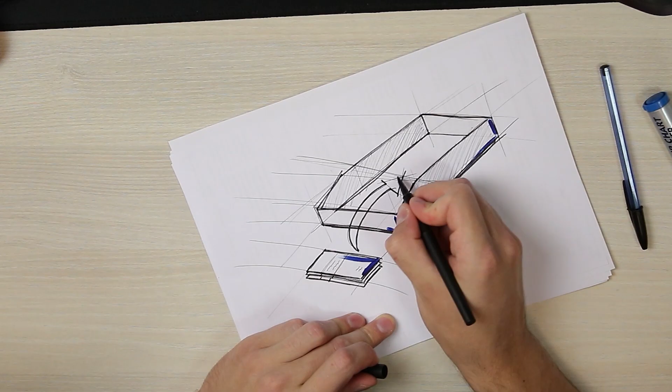Nope. So, the idea was, starting from a storage cardboard box, widely used in the rest of the inventory, find a cost-efficient way of having the different magnets displayed and arranged so that you can see every single reference at once, in alphabetical order, making it easy to grab one, restock, and all of that with a little bit of sturdiness. Because this ain't a fine watch manufacturer, it's a tea and coffee inventory. Gotta move. Gotta go fast. Looking for the big bucks down there.

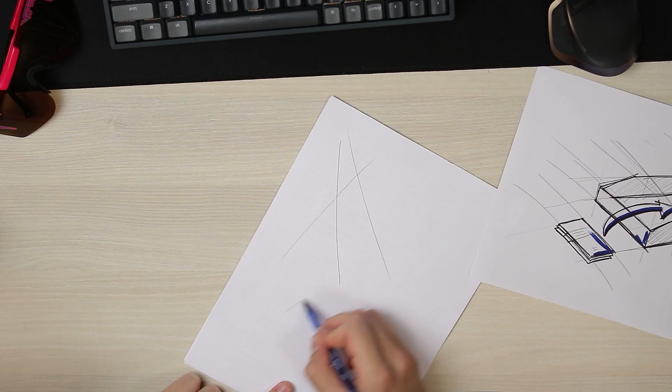With that information, I bust out the calipers, my measuring tape, pulled up my pens, and it was time to get into the intricate world of product design. I started with the measurements and the modeling of the box, in which I needed to make the entire contraption. I needed to come up with a solution to create independent compartments that I decided to call mag holders for every single magnet reference for a set amount of magnets. I called one compartment a mag holder. Yeah, it's badass. I like it. First one to judge is not invited to my trademark party.

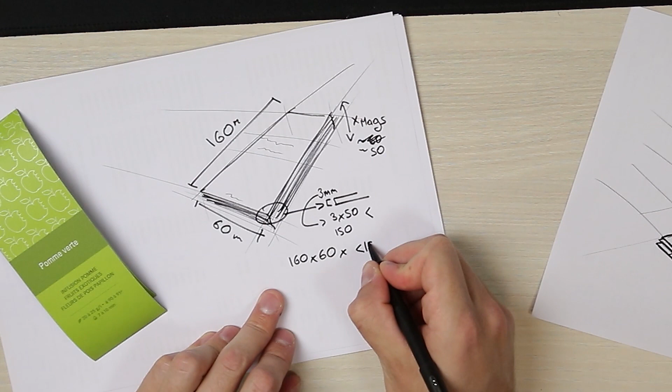Each magnet is 160 by 60 mm and 3 mm thick, which are some above average measurements, by the way. No issues with that. With consideration that we would not have more than 50 magnets per compartment, I now had a volume to build the mag holder around.

After a few research about wall thickness recommendation for 3D printing with PLA, I jumped into SolidWorks, and it was a first time for me. But being an avid 3D software user and developer, SolidWorks was a breeze to domesticate, and I was an expert in absolutely no time.

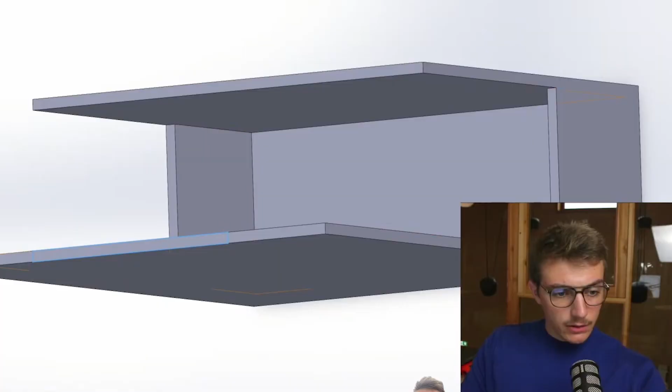SolidWorks is nothing like any other 3D software I've used. It's like, imagine Blender, but way more corporate. It's a bit like if Cinema 4D decided to quit its art major to go into law school kind of vibe. It's a bad analogy. It was hard, right? It was hard.

But after a few tutorials here, one or two Tylenols there, I came up with an award-winning design. Ladies and gents, mag holder V1. Honestly, just don't say anything. I know. It looks like dog water. There obviously are some progress and upgrades that can be added to this design. And here were the observations.

The insert is way too snug. I would like to be able to be less surgical when it comes to insert the thing inside the thing. The manufacturing process of the magnets makes it that the sheet comes with a bend, meaning it flops around in the holder. We need a better way to maintain the entire structure inside. And that small lip in the front, just like a 50-year-old angry conservative Twitter account, doesn't have any purpose. That entire backplate can be optimized in terms of materials it needs during printing.

And just like you're watching, that bottom doesn't need that much attention, printer material-wise. It's a butt joke. It worked way better in my head while I was writing that one.

One good thing we can take away from this design, though, is that 2 centimeters extra length at the tip, that I would absolutely love to have myself. That is the perfect amount of extra material to display the reference name and color code. Well, based on all of those reviews, notes and new data, here is the MHV2.

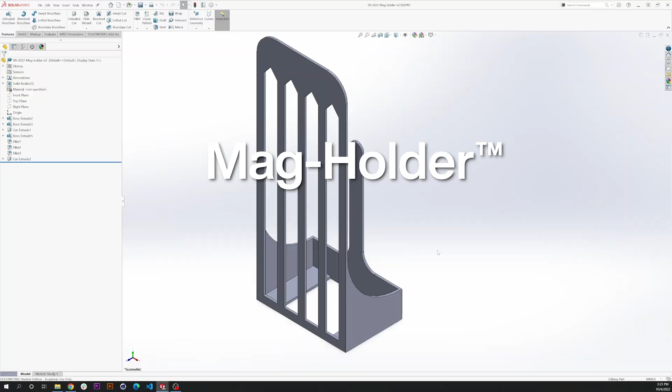We got rid of the front lip and inserted this big extrusion here to maintain the bend of the magnets inside of the holder. We rounded out those sides for extra support, and also added those holes in the back to be able to save some more material, because daddy is a cheap ass. We have this triangular 40-degree pattern at the top so that the printer doesn't have to print over direct emptiness. And based on some research I did, 40 degrees is safe enough.

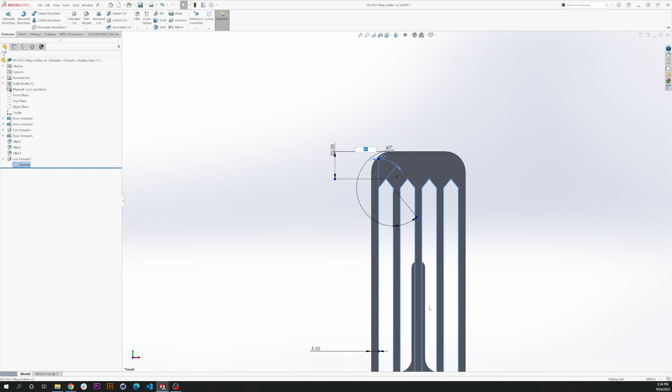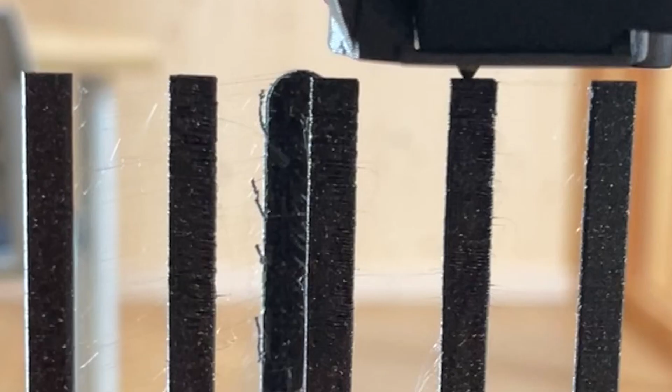Oh, but why are you showing us the SolidWorks model and not the print itself? It seems absolutely perfect. Why? That's why. This design, just like Angela White on a busy business Wednesday afternoon, absolutely sucks. The back plate of the V2 was a disaster to print, and even before it had time to finish, I had to stop and pull out before disaster happened. See what I did there?

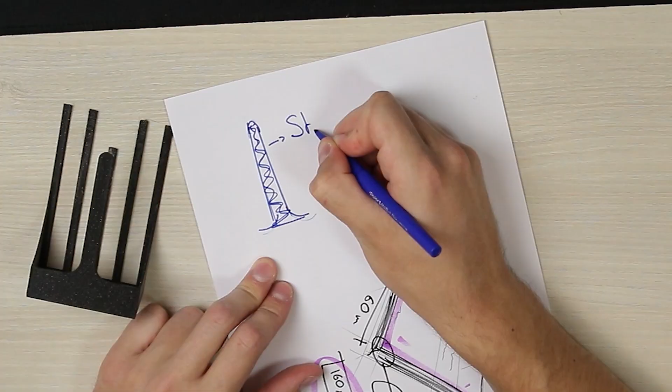I am severely sleep deprived, but before directly going back to the drawing board, we can make some observations. Starting with this front part, what I decided to call the shtick tension detention system is way too thin and flimsy to serve any purpose. We'll have to find a way to make that way more sturdy. Sturdier? More sturdy? Sturdier?

No. The back design obviously also needs a review, but the bottom hole seems to be the right dimension for those big boys. The boys being the magazines. Cannot believe I am the one writing those things. So, with those, back to SolidWorks, and here is V3.

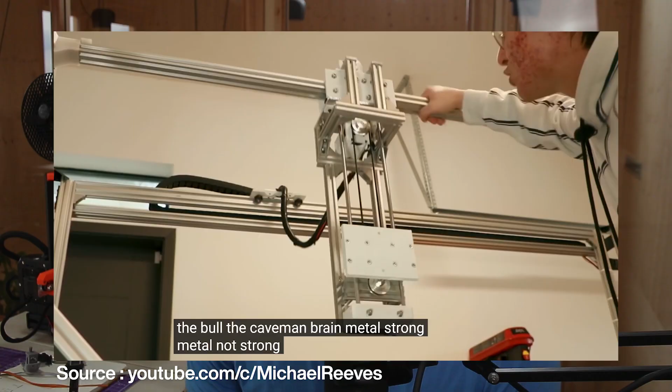This joke was shamefully taken from Michael Reeves' content. Michael, if you're watching this, I love you.

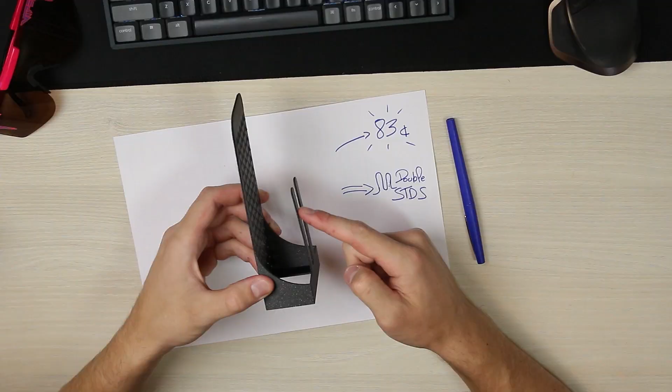Please notice me. Also, in the front we decided to go double shtick tension detention system for double the fun, but those are too soft as well. Also, the magazines that we are designing the MH4 for are the newer dimensions, and we still want the design to work with the older, smaller magazines too. And this hole at the bottom is way too big to handle for those smaller fellas, which is absolutely okay. Happens to the best. So, conclusion from the V3, we need better support for both the back...

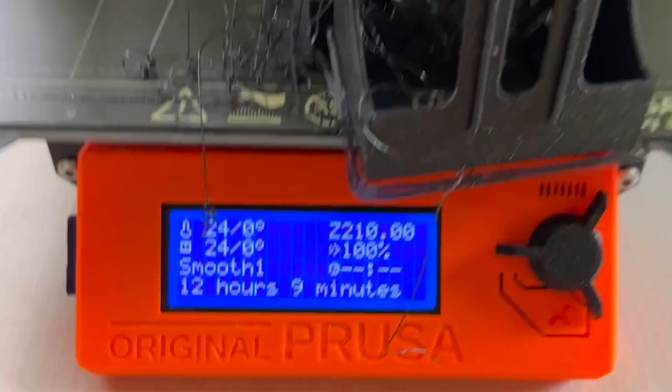If the first layer gets unstuck from the printing surface, the entire part goes bye-bye and you just ruin some sweet PLA. Well, this is what my smart ass thought. I mean, a piece of steel is a piece of steel, huh? Plastic goes sticky on the surface, everything is fine, huh? No. I ruined two 35-hour printing batches because of that.

It was at this moment I learned that having a really clean bed, and even helping the first layer adhesion with PVA glue, was a thing. It also means that the bigger the surface area of the first layer, the better the part is going to stick and stay in place. This is also why I added thickness to the added bar in the bottom hole to add more surface area on the MHV 4.1.

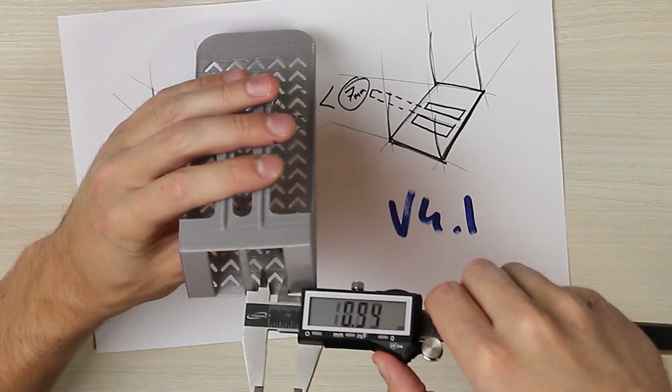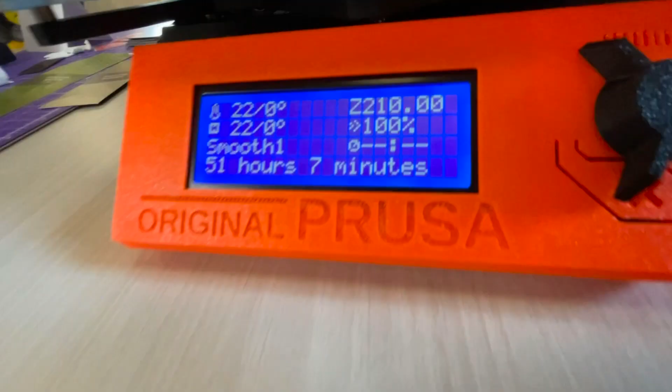And smooth brain time again. It was only after printing a 51-hour batch of 9 mag holders that I discovered that this tiny modification put the whole bar and the double STDs out of center. God, I love my brain. I fixed that last little issue, reconsidered that back pattern for more printability, and boom, V4.2 baby. Solid enough, not looking half bad, sturdy, printable, it's perfect. We got the mag holder, we got the box.

Well, now it's time to find a solution to prevent this from happening. I wanted to create a sort of grid to go at the bottom of the box to hold the array of mag holders in place, while neatly separating them at a regular interval. A little bit like Zack Freedman's Gridfinity project.

By the way, Zack Freedman, Voidstar Lab, good YouTube channel, great YouTube channel. Zack, if you're watching this, love you, dude.

Love you. So as I said, a little bit like the Gridfinity project, but with a bit more of a permanent fit. And as you can imagine, seeing how much of a nightmare... Oh Jesus, what is wrong today? Seeing how much of a fucking nightmare it was to develop the mag holder, developing the grid matrix was an absolute disaster. Everything went well. No rage, no printer catching on fire, no nothing.

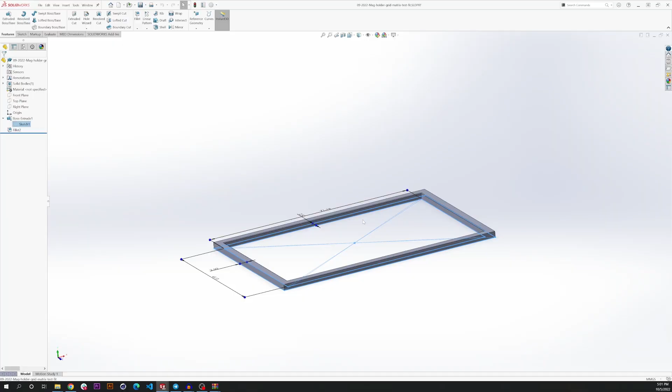Even with the problems encountered during development, that project was an absolute banger to work on. This is room temperature coffee, okay. Oh, the headache. I have learned so many new things. Got to finally create a product from start to finish entirely by myself, and also helped a company that is obviously really important to me. It's a new skill unlocked, and boy oh boy, we gotta have fun with that in the future.